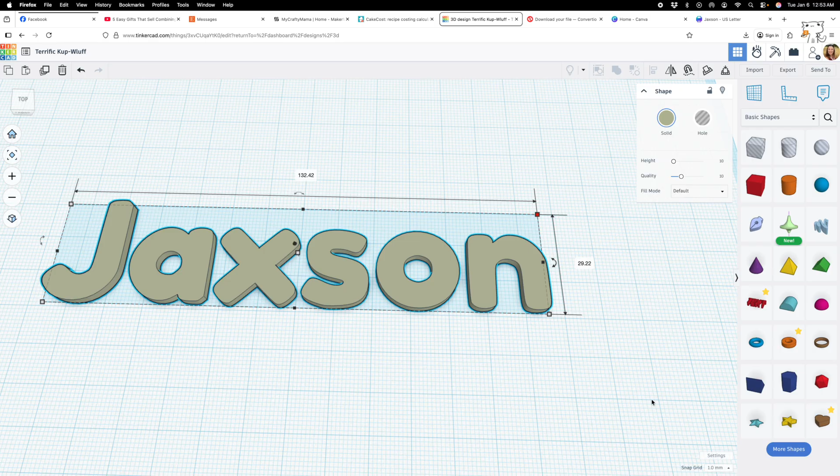I thought I wrote down how big this is supposed to be. We want our name to be around 2.5 inches tall. Right now I have it in millimeters, 29.22. You can move your view this way. To go to inches, I go to settings, then imperial, and close. Now we'll be able to see 1.15.

What I can do is click on that, then click there, and put 2.5. There we go. Now it is 2.5 inches tall.

Let's see, that is good. You can make it longer if you want. Let's see how long it is, 5.2. Let me look at a ruler just to see how big that is. I think we're gonna go longer, so I'm gonna try to stretch it. There we go, that's nice. Now we're at 7. That's pretty good for this name that is 6 letters long.

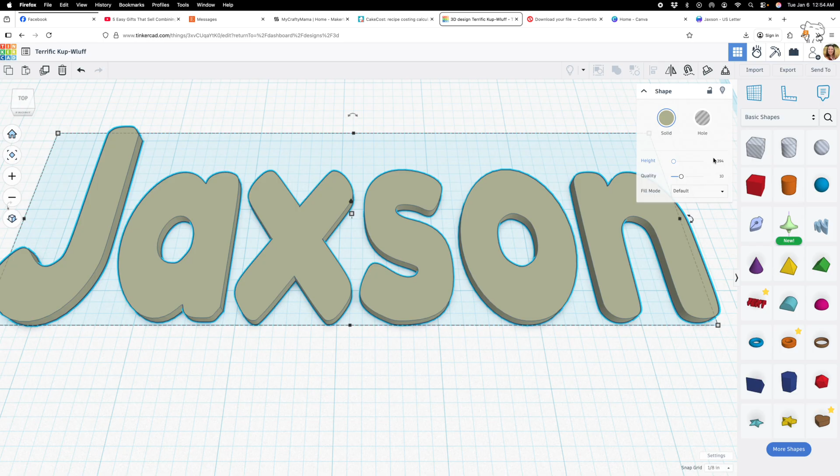All right, so now we're gonna go up here to duplicate. Now we have a second copy on there. So now we're gonna make sure that it is on full quality and then change default to outer line. You will see this change. So now we have an outer line.

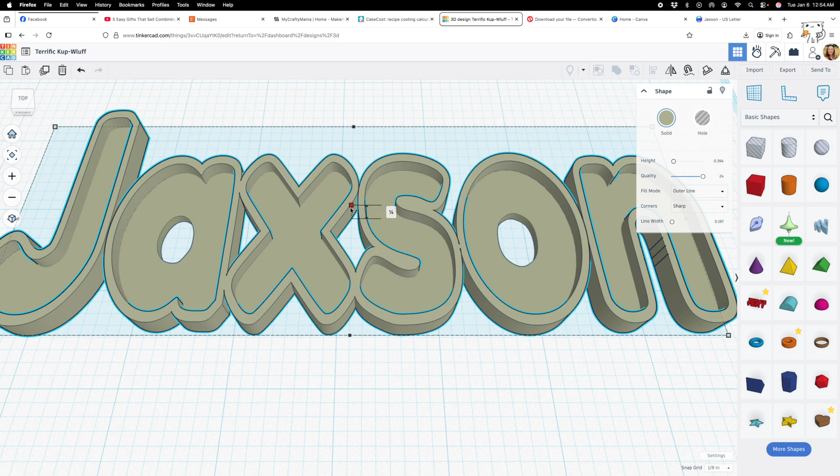Now what you do is, all you do is you drag this little square up. And this makes our outline.

Okay, we want this to be about 1 inch deep. But we also have to take into consideration the back. Let's see how thick the back piece is. We want the back piece to be, I don't know, let's say 1/4 of an inch. 1/4, 1/8, 1/4. Okay, because kids are rough on things, so let's do 1/4 of an inch.

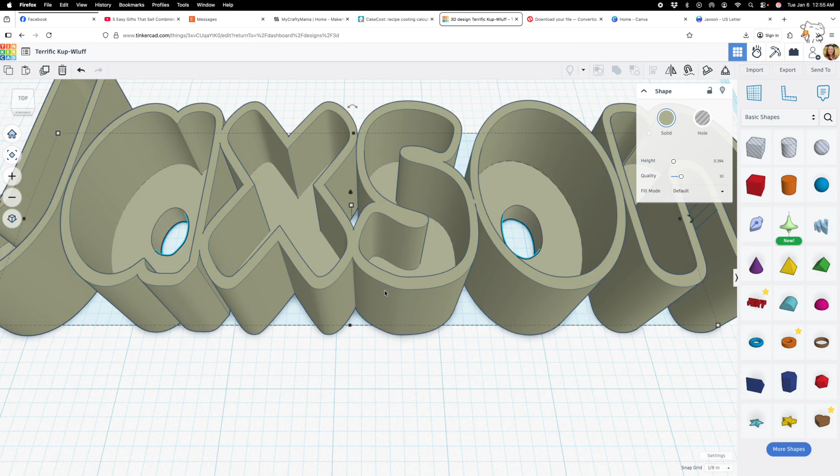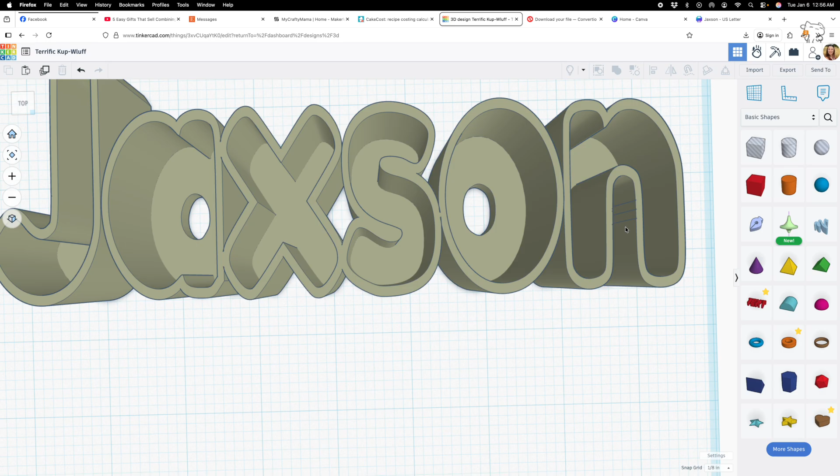And then this piece will go up 1 and 1/4 so that we do get our 1 inch in there. There we go, so now we have that. Let's make sure that these pieces are indeed touching. We want them to all be touching. We don't want any spaces really.

But the next thing we're going to do is we're going to add some bars to the back. So you grab your square and you will drag it to cover all behind here.

What we're doing is making a bar for the kids to press down on. If you see this, it snaps to the grid. Right now we're at 1/8 of an inch setting, so I'm going to turn snapping off because I don't like it to snap most of the time. And I prefer working in millimeters, so I'll switch back to metric.

Okay, so we want this bar to go all the way from that first letter. We'll want to see where that bar is exactly, so we'll go to the bottom. This looks great, we'll move this in some. I think we'll move this down, and then this can go in more so that it's not overlapping over here.

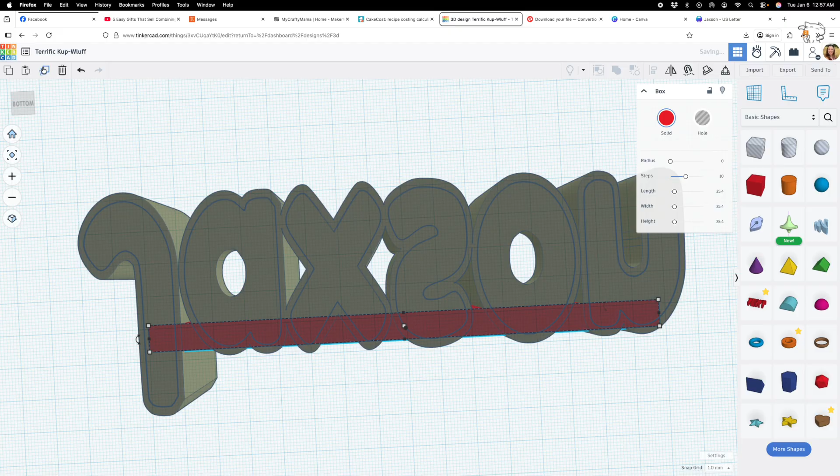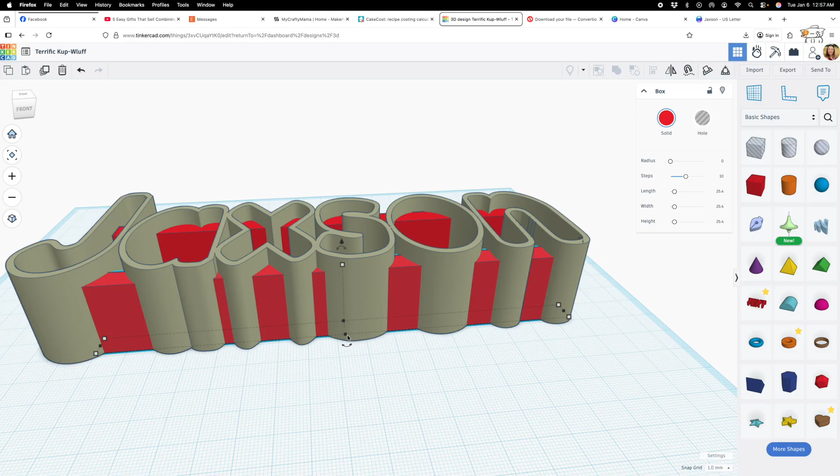So there's that, and then what we're going to do is touch this bar and push duplicate again, holding the shift key. We're going to pull it up all the way to right about there. That should be good. We'll move this all the way to this side, and then come back this way. We definitely don't want it this tall, so we'll drag this down.

We were at 1/4, so that should be 6 millimeters, I believe. Make sure... okay, we can't see it now, so that's good. And now we'll do the same to this, down to 6. Perfect.

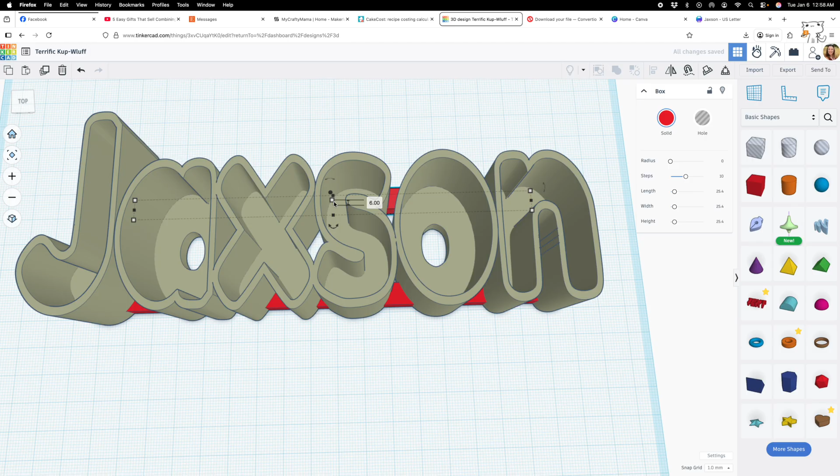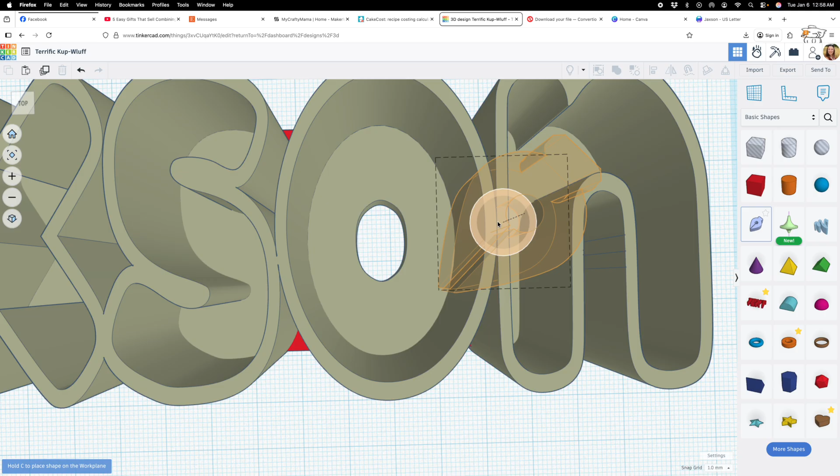There we go. And then as you can see, this is missing the 2 spots around the letters with the holes, the A and the O. So all we have to do here is grab onto this sketch tool and drag it over here.

All right, so this will draw where we want. So what we're gonna do is, again, come down here and turn this snapping off. Then I'm going to just do 4 nodes. Okay, then you come over here to this, edit.

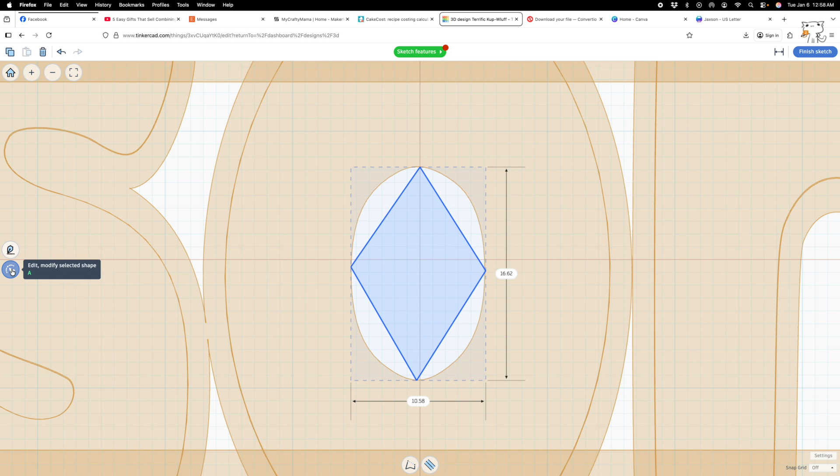So I'm gonna select all of those and push this. Ooh, that's beautiful, that is pretty beautiful for this. It's pretty good. So you can click out of there and then click it again. Adjust just slightly to get that there.

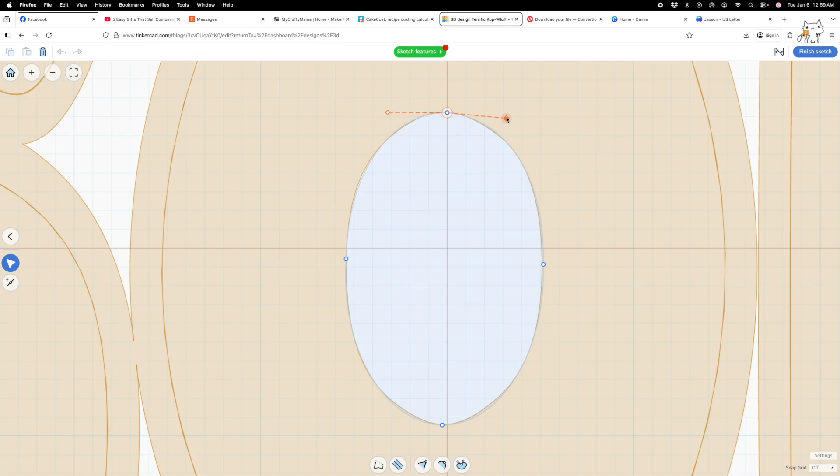Oh, if these numbers pop up, go up here and click this, it makes them disappear. They're annoying, they will be in your way constantly. Okay, so there's that.

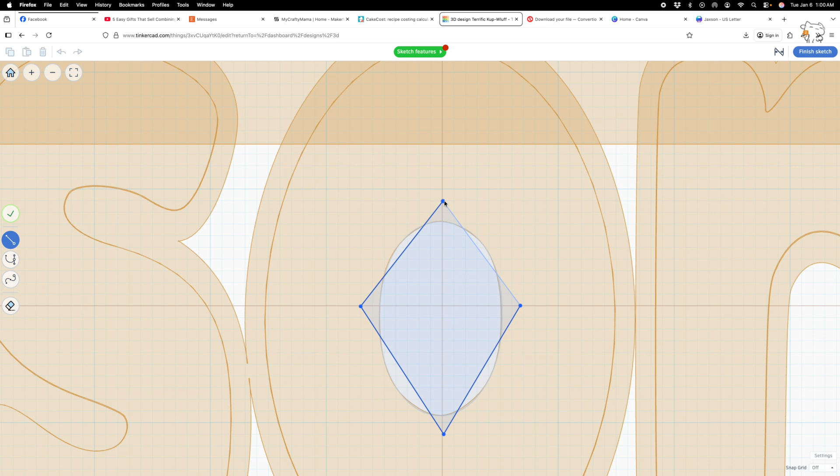And then click off of that, click this back arrow and click on this pen again. We're going to go about the same thickness as all the other lines. We're going to go back here again, select all of them, and push this end one. That looks pretty good.

Maybe move this out just a little bit. Okay, let's push finish sketch and see what that looks like.

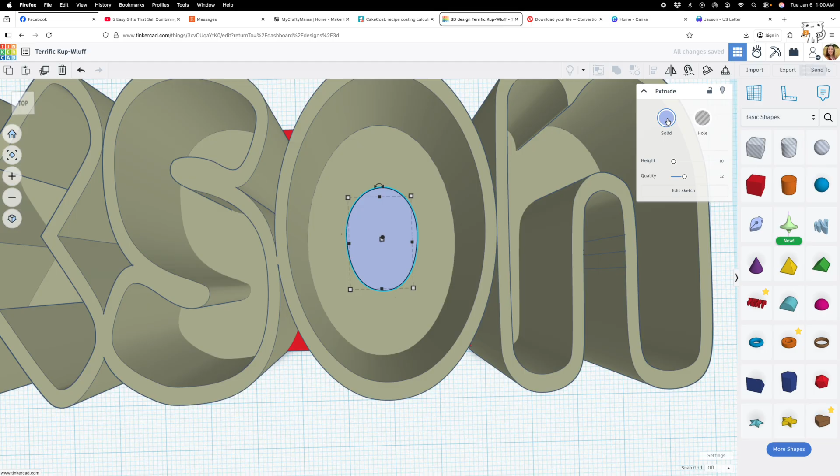Let me see, let's push this down. Where's our other color? Don't worry, I'm a professional. Okay, I'm gonna hide this. Where'd the other one go? Or is it all one? Oh my goodness, don't do what I did. Okay, hold on a second, let me think.

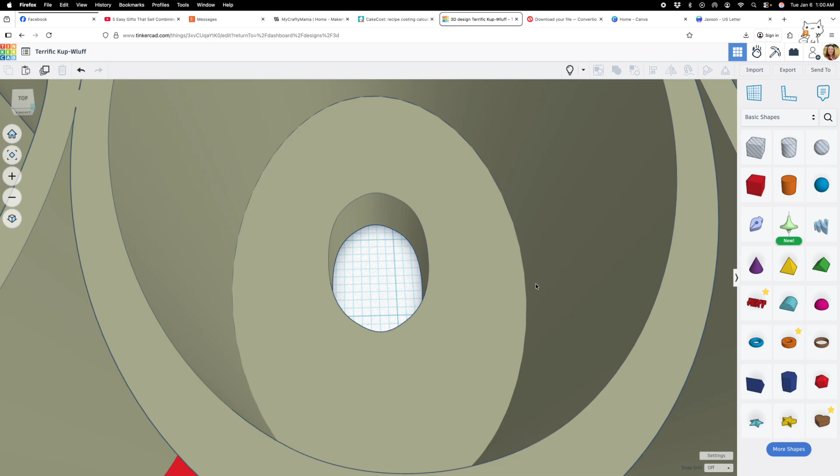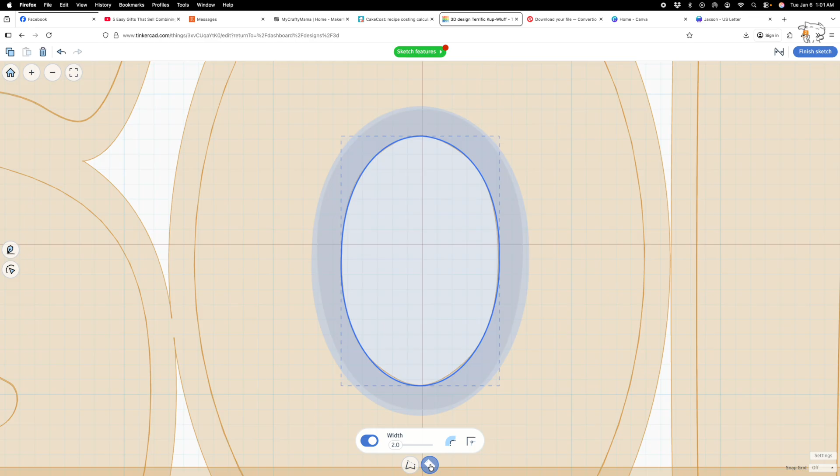We are going to unhide that. Double click. Let's see what happens when we click this. Okay. Let's say outside, this might fix all our problems. We'll match it to the other circle we made, we'll change it to round, and now we'll push finish sketch. And that did not do it either.

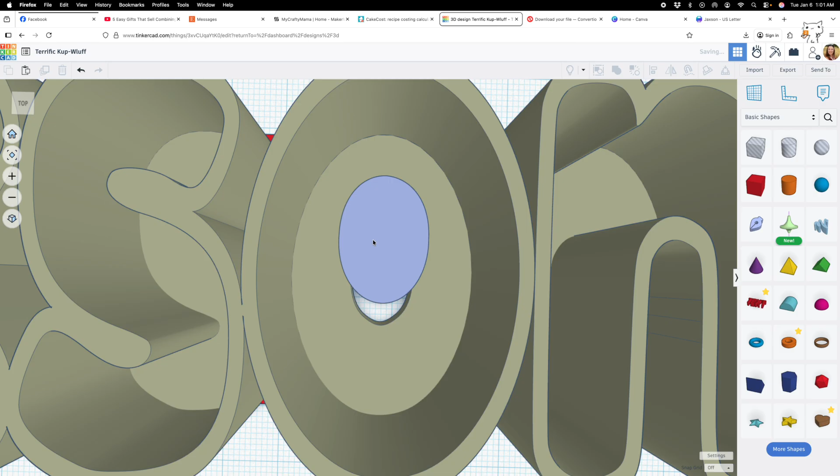I think because my other line is there. Delete. Don't mind me, okay. What I'm going to do is go back. When you get frustrated, just do what you got to do and then go back.

All right, so we have this. Is this the inner? No, this is the outer line. You can push T to make it transparent. There we go. All I'm going to do is make another sketch on top of it.

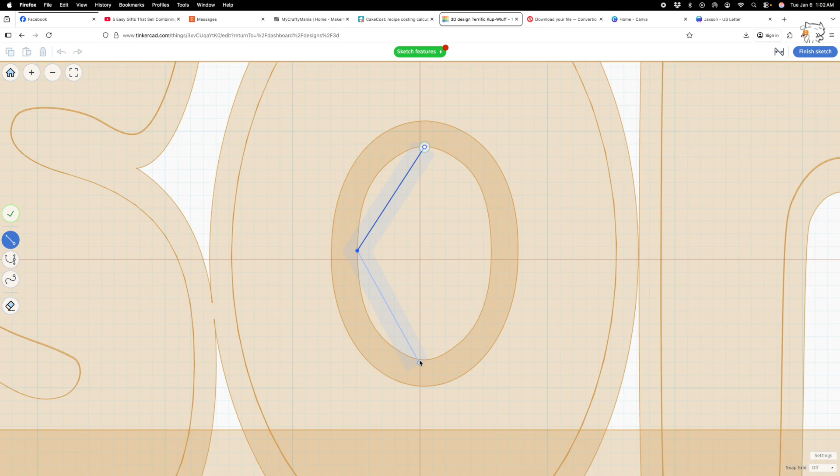Okay, so now we're going to make another one in this middle part. We're going to select all, do that, good enough, finish sketch. We're going to make this into a hole, and we're going to click that other one, then hold shift and click the hole, and then we're going to group.

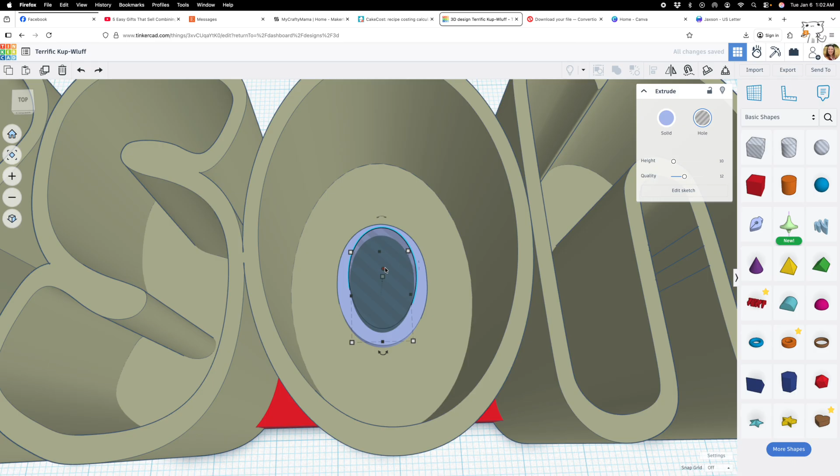Nope, something did not like that. Okay, we gotta push the hole down. There we go. Then click, then group. Not far enough. Undo. Make this sucker really tall so there's no mistaking.

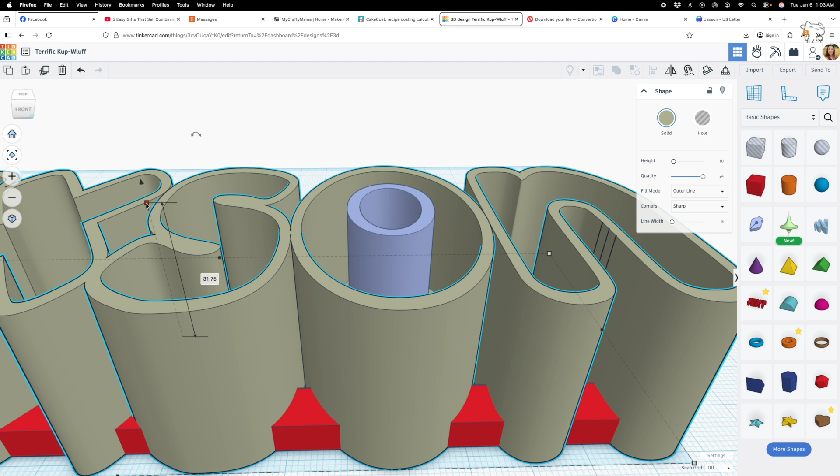Click, holding shift, and I'm grouping. There we go. Okay, so all we have to do now is match this up with the rest, which is right here in the middle, 31.75.

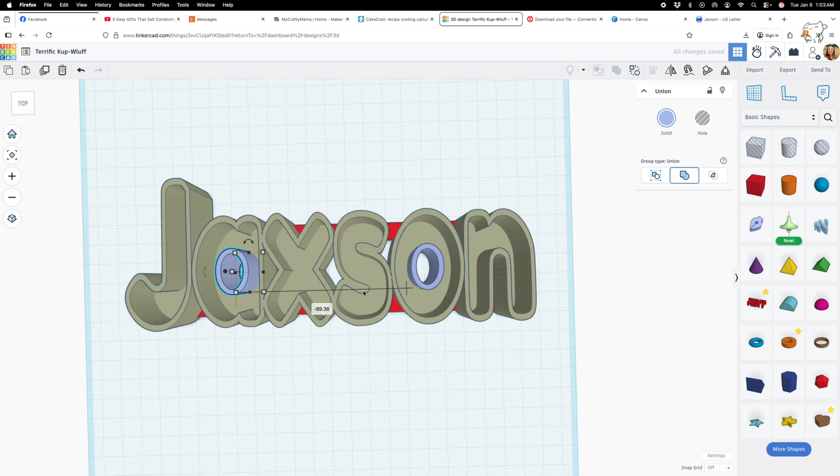So we will click 31.75, enter. There we go. Thank goodness. So now we might be able to just click it, copy, shift, and carry it over. Keep that shift button down. Okay, now we're just going to shrink it, holding the shift so that it holds its shape. There we go. We did it.

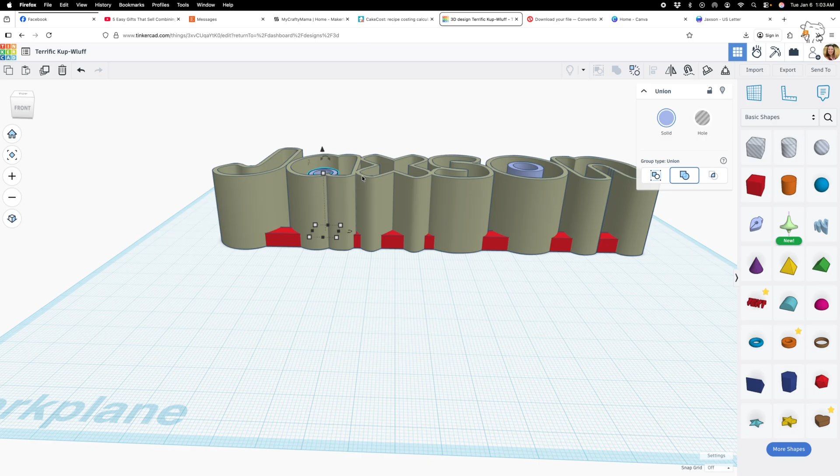Okay, let's make sure that, as you can see, shrinking it on the sides also shrank it sideways a little. So 31.75... 31.7, nope, 75. Where'd it go? Where did it go? What did I do? Control Z to undo. 31.75.

Designing can be frustrating for sure, but you just gotta laugh it off, guys.

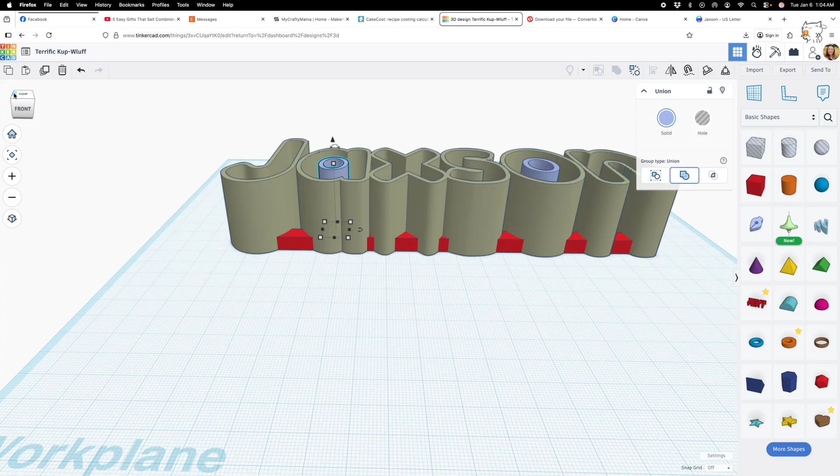All right, so now we've got everything. It's all the same height. All we have to do now is select all and push this. This is the group button. Ta-da! We did it. Now it is all one piece, all together.

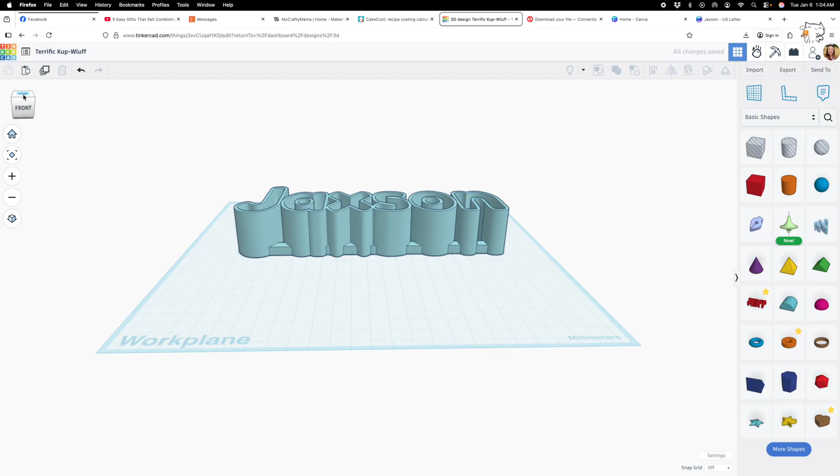We can change the color. It doesn't really matter, but it makes it cuter. All right, so that is that. So now you come up here and rename it from this silly name. Okay, and then you click on it, push export, STL, and out it goes. That is all you do to make your own personalized sand toy, guys.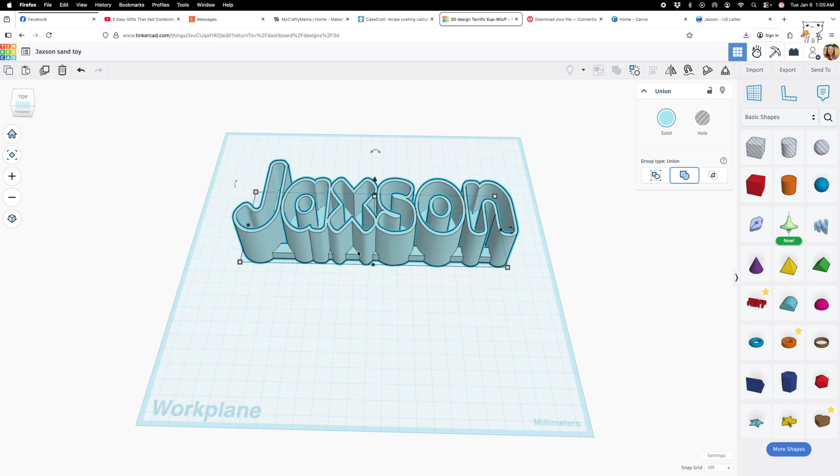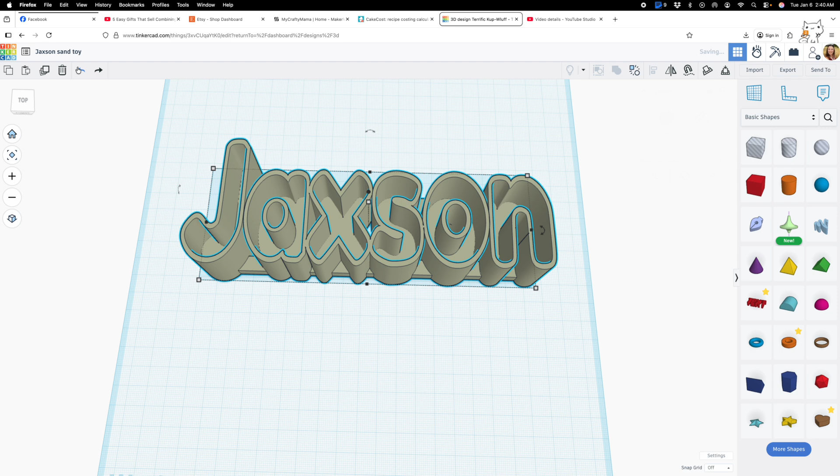Okay, guys, I just realized an hour later that I did something wrong. So if you were to print this, the child would turn it over and press it into the sand, and their name would be backwards. So let's fix that. So what we're going to do is we're going to go back and ungroup these things.

Okay, it's a simple fix, luckily. So what we're going to do is grab this bottom, the red, and the red, and we're going to—you can move this like this. We're going to grab this little arrow and pull them up.

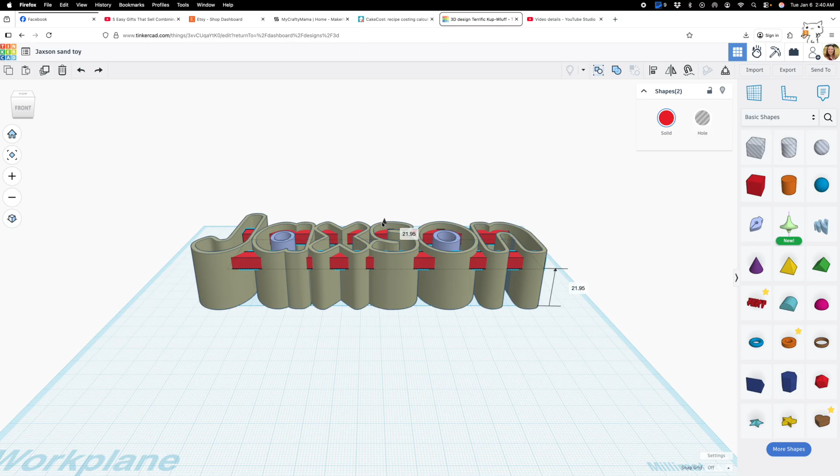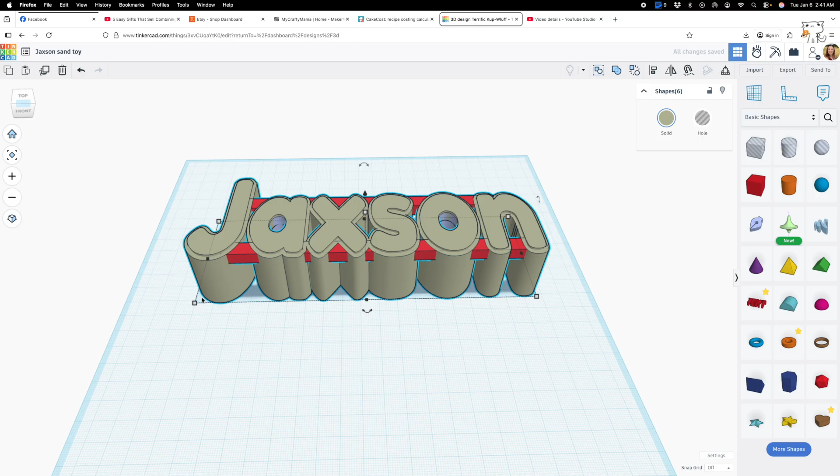All right, so now that we have that—nope, that bottom one did not come up. Let's move it up. All right, so now that we have them all like that, we're going to take it and we are going to flip it. So as long as you stay on the inside here, it'll snap to the grid. Okay, so there we go.

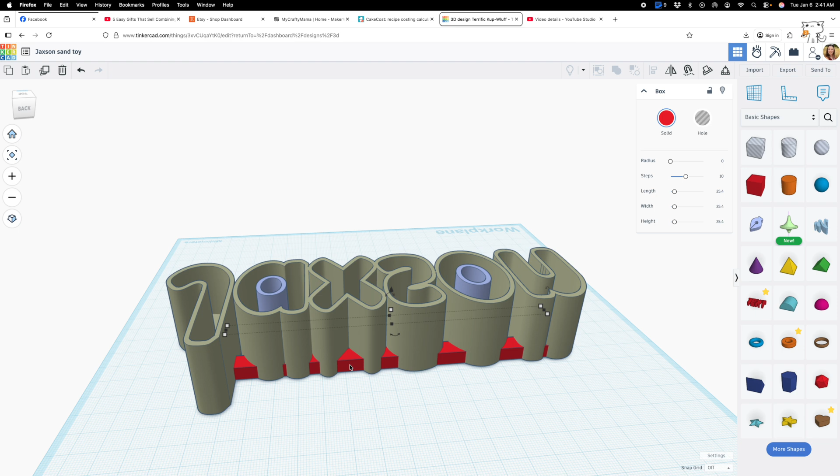Now what we're gonna do is we can click the red and push D, and it drops it to the floor. If you do not drop it to the floor, you are going to have trouble in your slicer because you're going to need supports. So click this bottom one and make sure to push D, confirm that they are no longer floating. Then we will regroup.

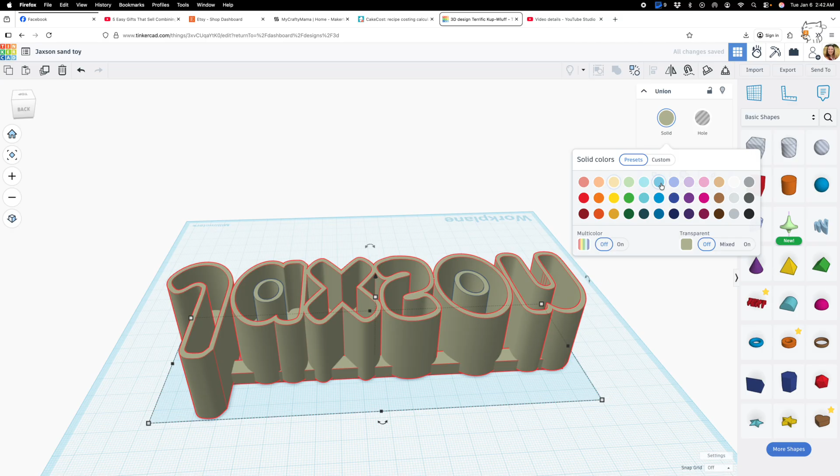Ta-da! Making tutorials is not for the weak, man. This is like my third or fourth time just trying to get this one correct.

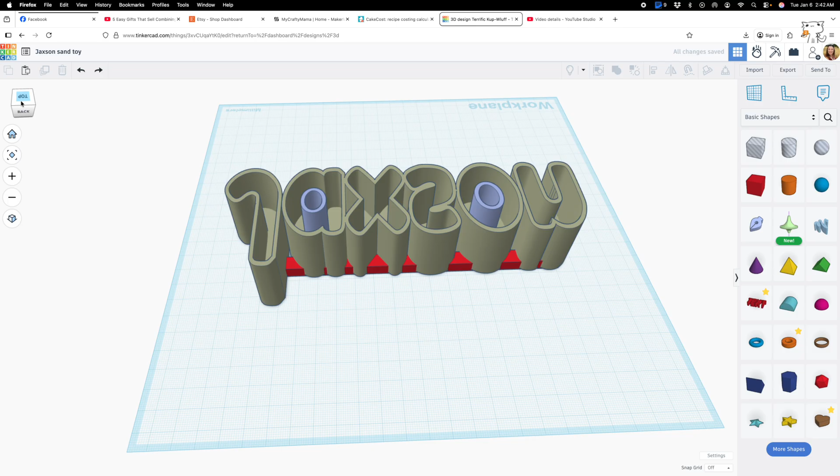Oh, look, something's floating. Nope, we're wrong. Well, we are not wrong, I am wrong. Okay, let's ungroup. So I'll just do that. And there it is, look at that—floating. Click it, push D.

Now these are too tall. D, D. It's so easy to forget a step. There we go.

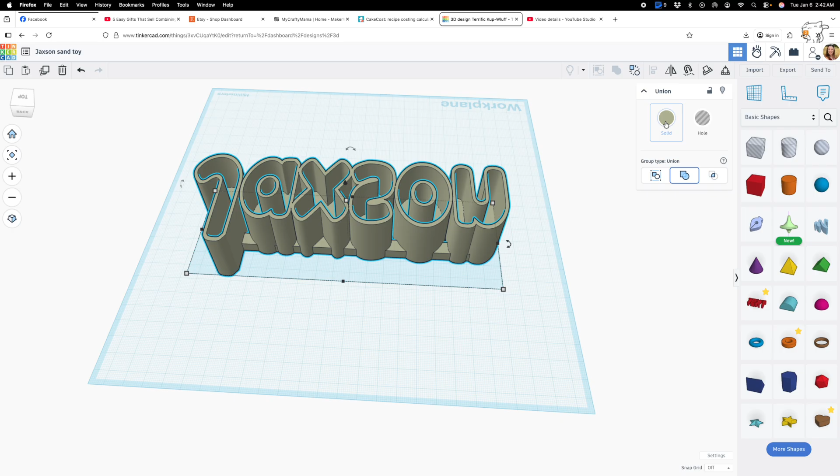Now it should be perfect. Printing it this way, you will not need supports. You should not need supports. Yeah, you should not, let's look. Yeah, all of this stuff is flat on the bed. Oh my goodness.

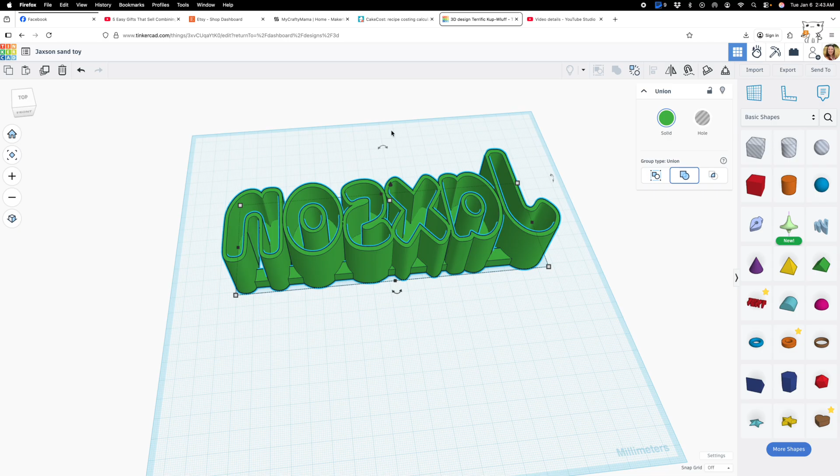Then you will take it, you'll click it, you'll make sure you have the name, and push export. Take it into your slicer, choose your color, and print.